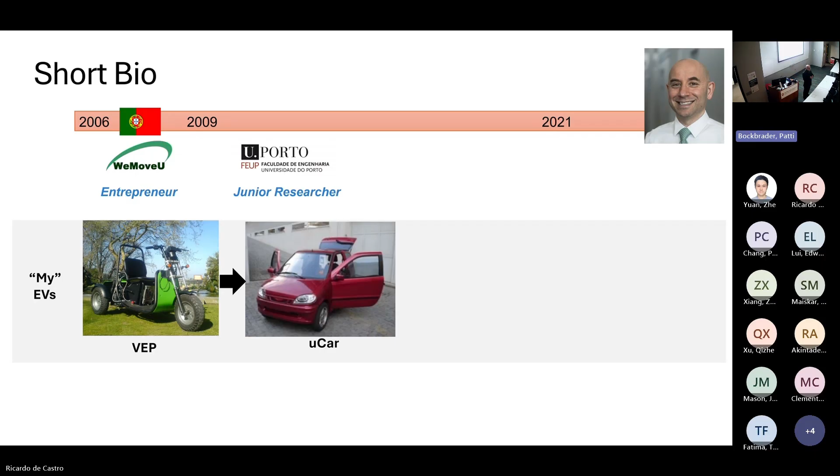So afterwards, I decided to go back to the university to pursue a PhD. There I had the chance to work on my second vehicle, as we call it, a microcar. It was red from the outside, but green from the inside. We were working with batteries, pre-lithium batteries, so the mass was very high. During this time, I was looking into hybridization between high energy batteries and high power supercapacitors.

Afterwards, I went to Germany, and as Marcello said, I worked a few years at the German Aerospace Center, DLR. Their core business is space exploration and satellites, but they also have interest in bringing space technology to Earth applications. I was part of this program for 8 years, and there I had a chance to develop my third electric vehicle, which we call the RoboMobil, the robotic electric vehicle.

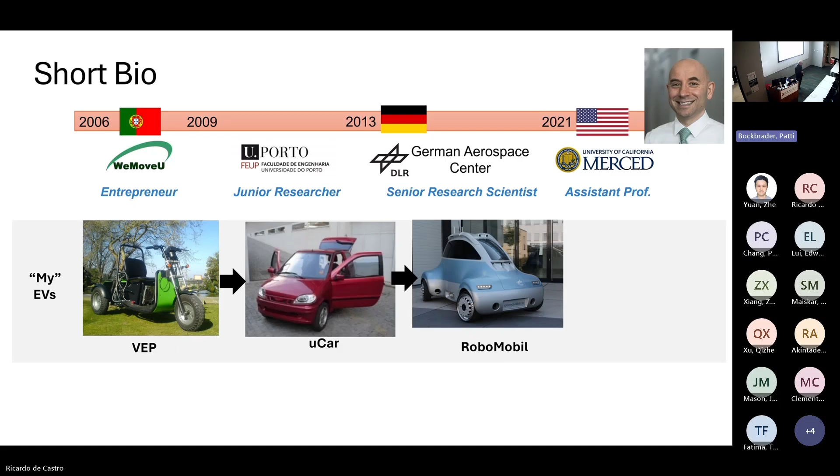Maybe a video to introduce this prototype that we built during my time there.

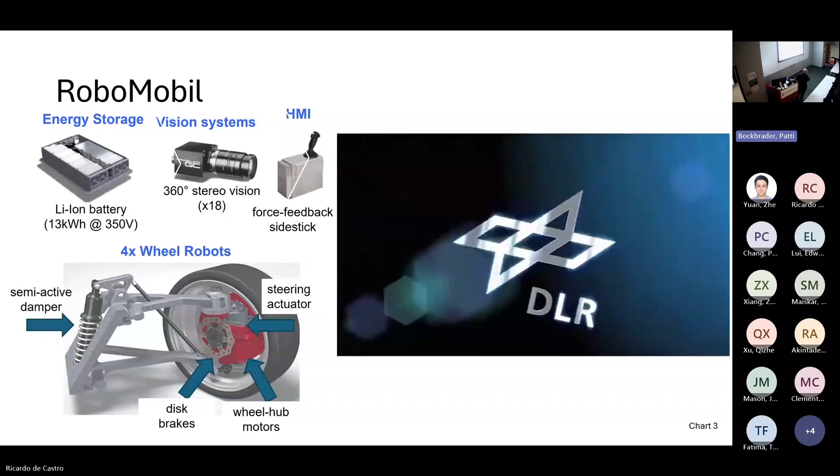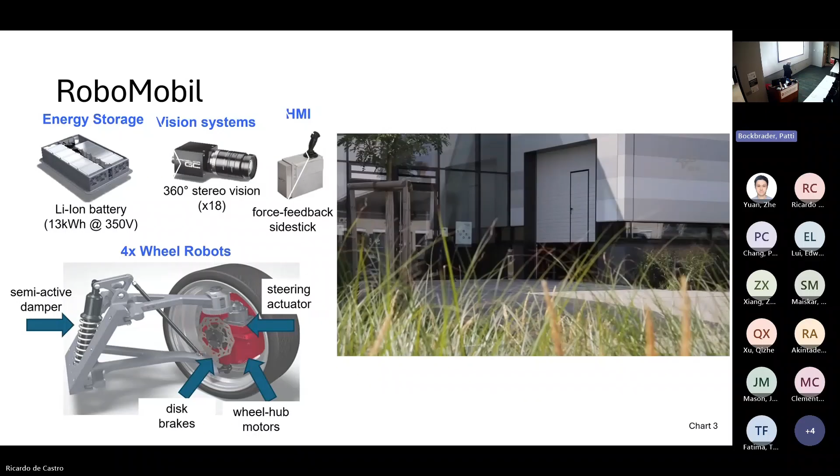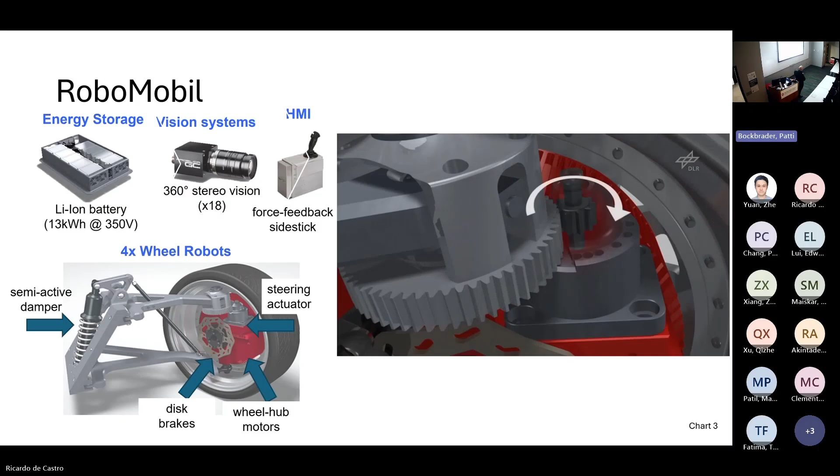So it's electric, has lithium batteries. One unique aspect of this prototype was the propulsion: each wheel had its own hub motor. We also had a steering actuator that allowed the wheels to rotate up to 90 degrees, brake-by-wire actuators, and semi-active dampers. Let's see if I can fast forward. Here you can see the animation of the propulsion. We have four of these actuators in each corner of the car, and we could rotate each wheel 90 degrees, so it was very easy for parallel parking.

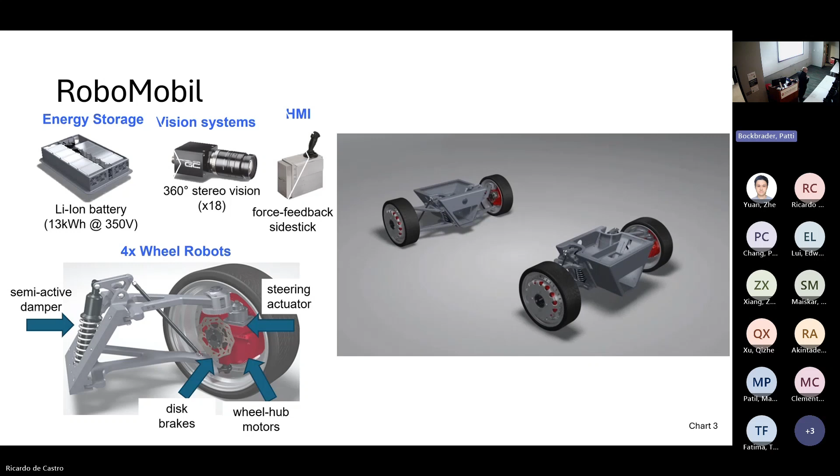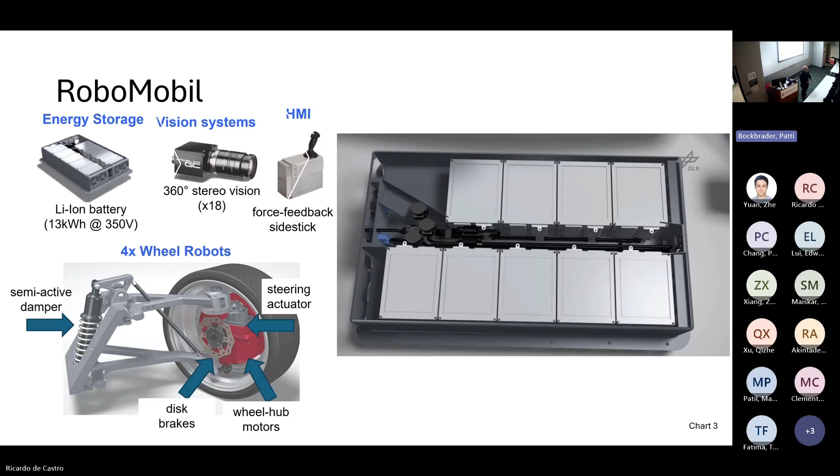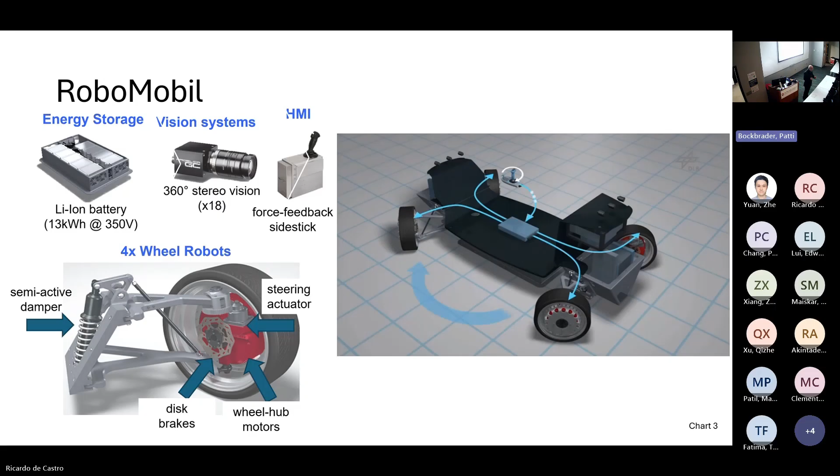Another unique aspect of this prototype was the interaction with the user. There was no steering wheel; we were using a force feedback side stick. So if you're used to playing computer games, it was very easy to use this vehicle. You can see here some of the operating modes of this car—we could rotate sideways, rotate on the spot. The idea of this vehicle was to deploy it in urban environments where space is very tight.

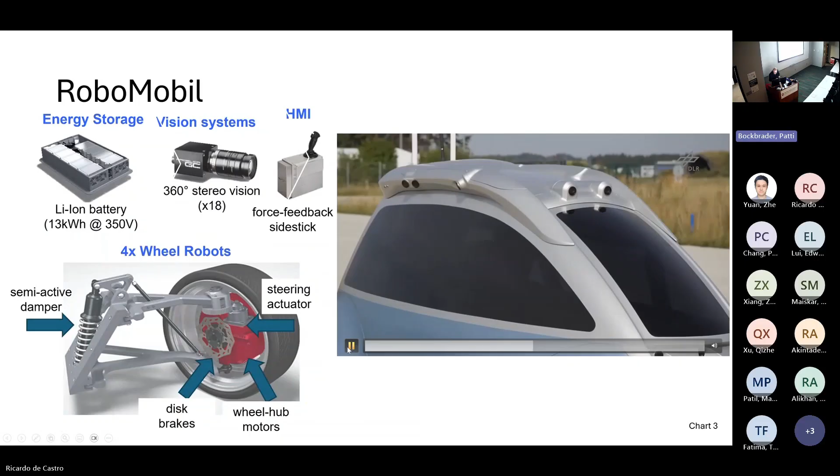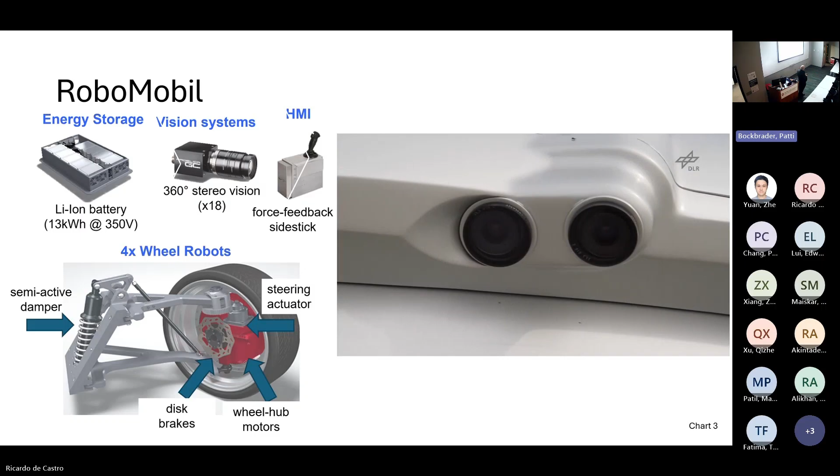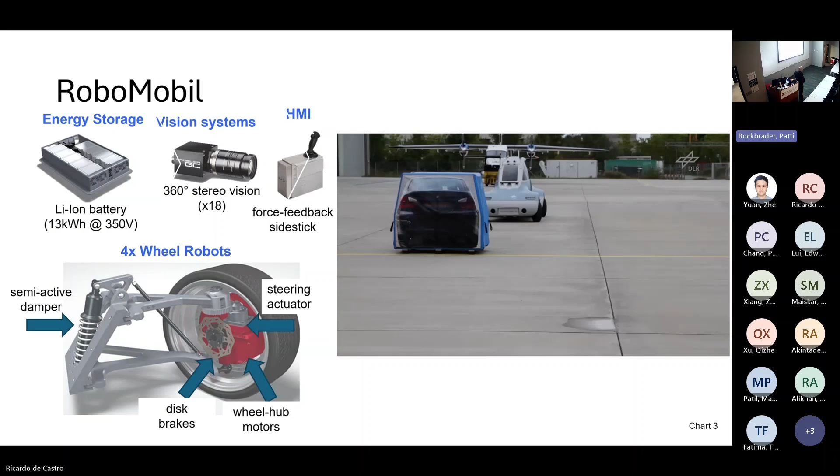In terms of perception, we were using 18 cameras on top of the vehicle. We had different operating modes for the vehicle: manual, semi-autonomous, and autonomous. One of the coolest things you could do was obstacle avoidance, exploiting this for the steering. You can leverage the crab mode to quickly perform avoidance, and the parallel parking was really nice. So if you struggle with parallel parking like me, you can just plug in and do it.

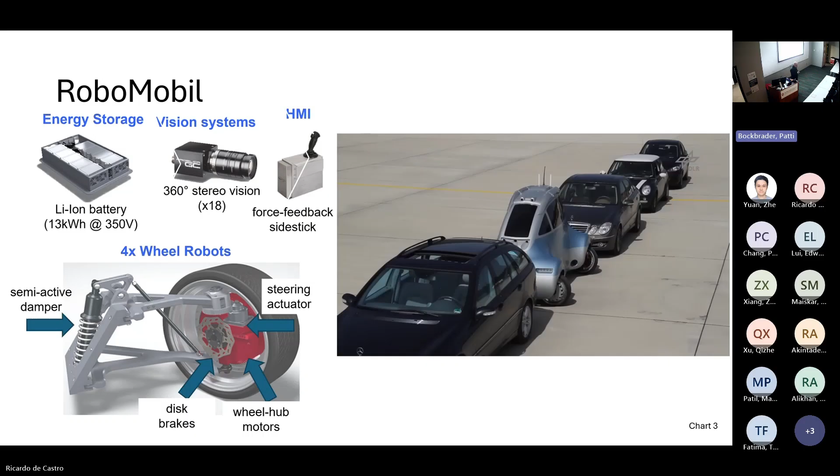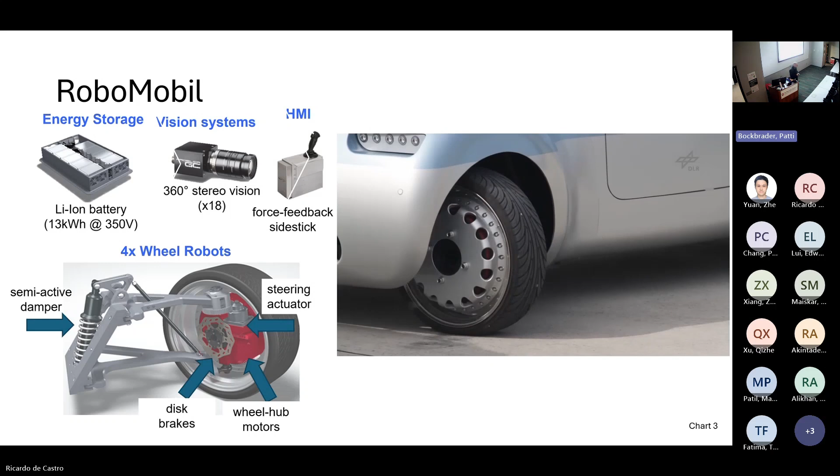So this was my life before coming to America. I was having fun with these prototypes. Then in 2021, I came to California, and I had to restart from scratch—I didn't have access to this kind of infrastructure. So I decided to pivot my career a bit and look more into the transportation aspects.

When I went to California, I realized that the state is at high risk of natural hazards and natural disasters, and one of the highest risks is wildfire. You can see here many areas in the state that have very high risk of wildfire.

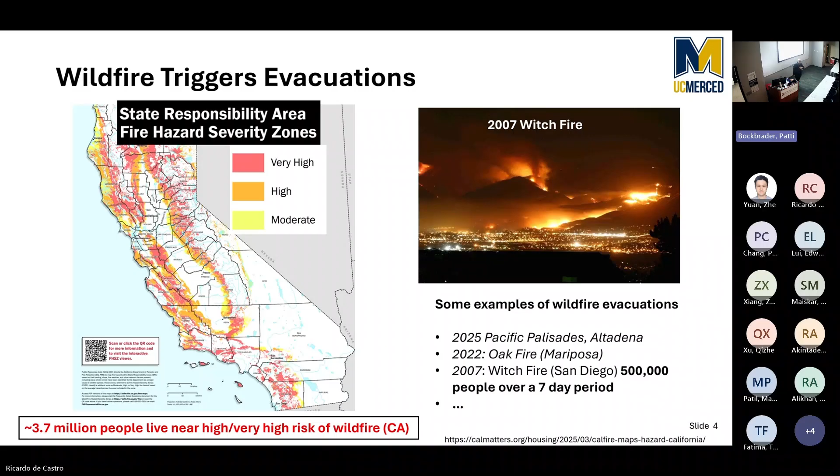Almost 4 million people live in close proximity to this danger. When wildfire occurs, local officials often need to ask people to leave their homes and seek shelter. Probably you heard what happened last year in LA. I live in Merced, close to Mariposa in the Sierra Nevada, and every summer there are evacuations due to wildfires there. The largest evacuation before that happened in 2007 in San Diego, where more than 500,000 people had to leave because of the witch fire.

And it's not just wildfires, there are floods. For instance, there was a big incident before I came to the US, the Oroville Dam, where it failed. They also had to evacuate more than 180,000 people. If you go to Santa Cruz, there are tsunami problems, there's the risk of earthquake. Some of my family lives in Florida, and in the summer, with the thunderstorms, they are always concerned.

So I started to look into these risks and, okay, if we are driving an EV, how can we be prepared to deal with these evacuations? How can we plan for these scenarios?

And if you're looking into EV charging, you also need to consider where the energy comes from for the evacuation. So you look into generation, transmission, which can also be affected by natural hazards. When I started looking into this, I was particularly interested in the EV aspect, understanding if we are ready to deal with these evacuations if everybody is traveling by EV.

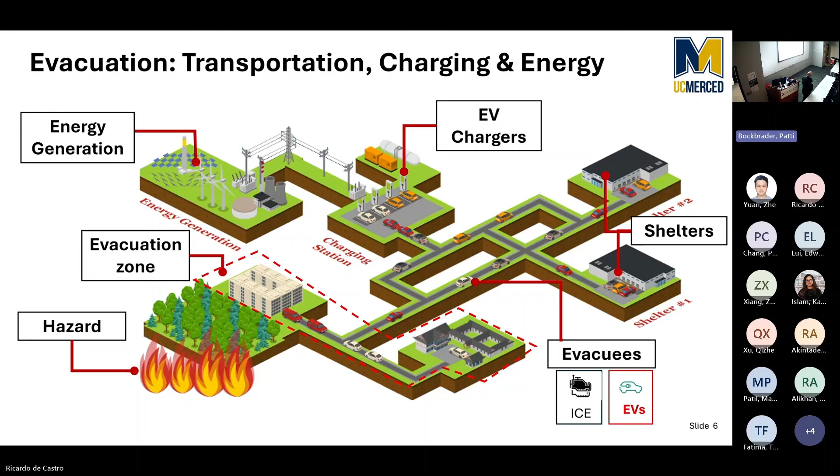Why is that? Well, in California, 39% of the greenhouse gas emissions are generated by transportation. There was a mandate four years ago that sets the goal of selling only EVs by 2035. I don't know if this mandate still holds, but that was the intention of the government. When you talk with the state agencies, they have all these nice projections: right now we are selling 35% of new vehicles with battery, but the goal is to reach 100% in the next 10 years.

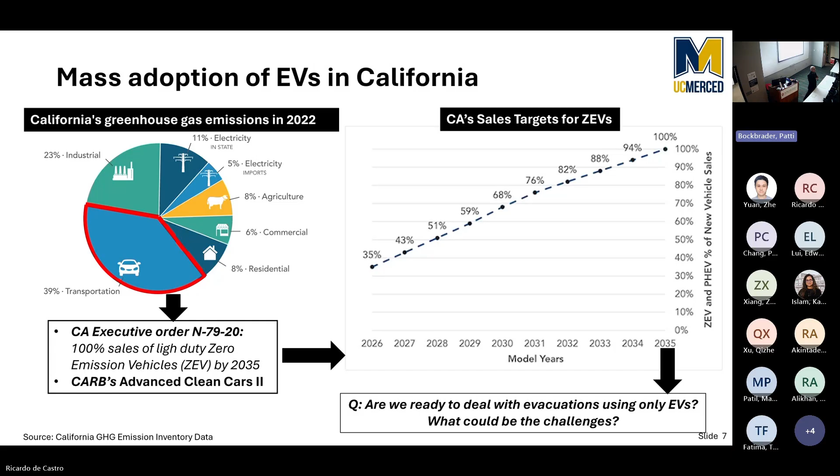So you fast forward 10, 15, 20 years, you have to deal with the evacuation, and the question is, are we ready to deal with this evacuation if everybody drives an EV? So what are the challenges that appear when you're doing an evacuation with EVs?

One challenge is related to charging time. If you only have access to level 1, it might take up to 2 days to charge, which is too slow during an emergency. You can use level 2, you can use DC fast charging, but it's still difficult to compete with gasoline where you can recharge quickly. Because of these long charging times, there are concerns about congestion in charging stations.

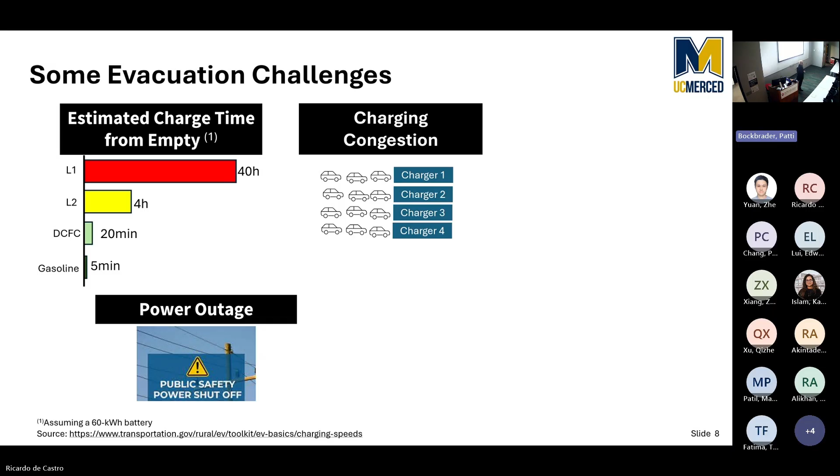There's also concern about power outages. For instance, I live close to the hills, and during summer it's very common for the power utilities to turn off the energy to prevent ignition of fires. So what should you do if you are asked to leave, but you have an EV with no energy in it, nor energy in the grid? You're in trouble. There's also traffic congestion that affects any kind of vehicle that you use.

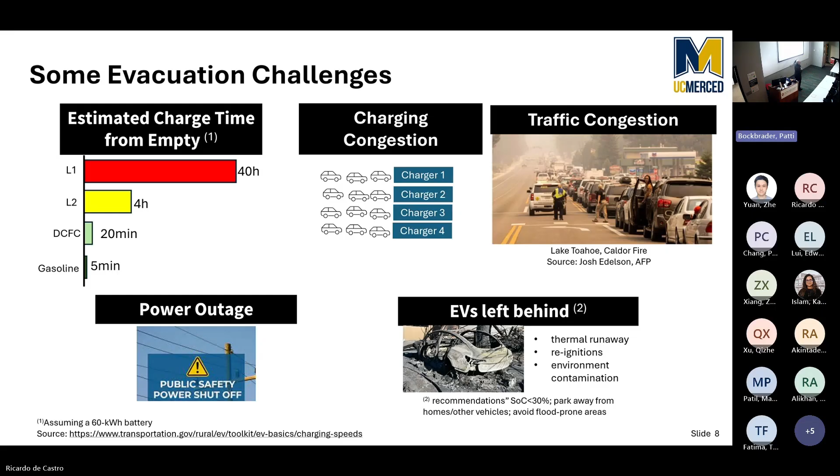Last year, the fires in LA also raised awareness for the risk of EVs that are left behind. If these EVs have batteries that catch fire, those fires are more intense. They also release chemical contaminations that are much more difficult for the cleanup of the fire. So we also need to think about the best practices to deal with these EVs.

With this background, I'd like to tell you more about three topics of my research. One is related to the routing of traffic during emergency cases, taking into account charging constraints of EVs, and also looking into leveraging mobile charging units that can support the fixed charging infrastructure if it's affected. So where should we deploy charging units?

In the second part of the talk, I'd like to show you some control algorithms we've been developing to reduce charging time for battery EVs, which is important not only during day-to-day operation but also during emergencies. Finally, if time allows, I'd like to touch on recent work deploying mobile robots to prevent wildfires—or rather, to prevent the need for evacuation. That's the third topic.

Let's look into the planning setup. I assume there is a given area at risk of natural hazard, with an evacuation zone, and I collect requests from people who want to leave: when do they start, where do they want to go, and what is their initial driving range available? We collect all these evacuation requests, and our goal is to recommend a route so people can reach the shelter as fast as possible while taking into account energy constraints.

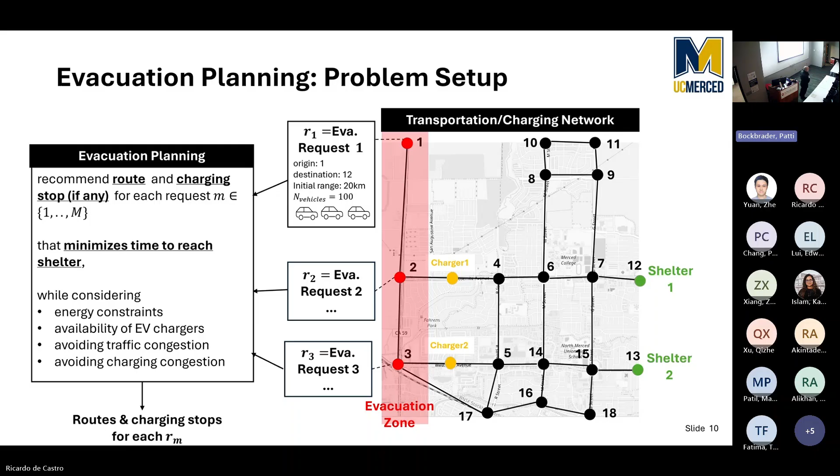Typically, this problem belongs to transportation engineering. As I mentioned, I'm an electrical engineer, so how do I start looking into this? I realized that in the last 20 years, I've been routing electrons in circuits. In transportation, what you move is vehicles; in circuits, what you move is charge. When charge is moving, you have current. On the transportation side, when you're moving cars, you have flow.

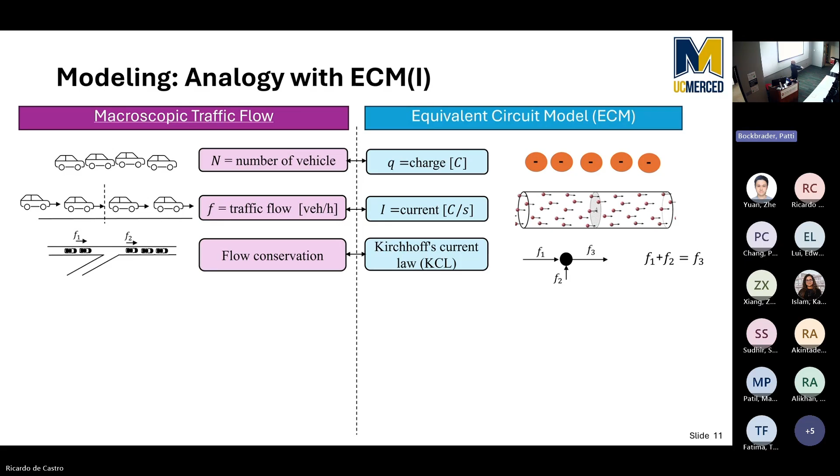Also, if you talk with transportation engineers, they tell you about flow conservation—if you have multiple lanes joining, the summation of flow must be conserved. In electrical engineering, we call this Kirchhoff's current law.

When you look into the fundamental relationships connecting the concentration of vehicles in a given road link and travel time, you see many similarities with macroscopic electrical relationships. Flow plays the role of current, resistance plays the role of travel time, and voltage plays the role of vehicle concentration. At the end of the day, you can implement this using nonlinear resistors.

Often you don't want to spend too much time traveling in a road link, so you want to limit the concentration of vehicles—or in the electrical analog, limit voltages and currents to prevent failure. That's how I understood this problem with my electrical engineering background.

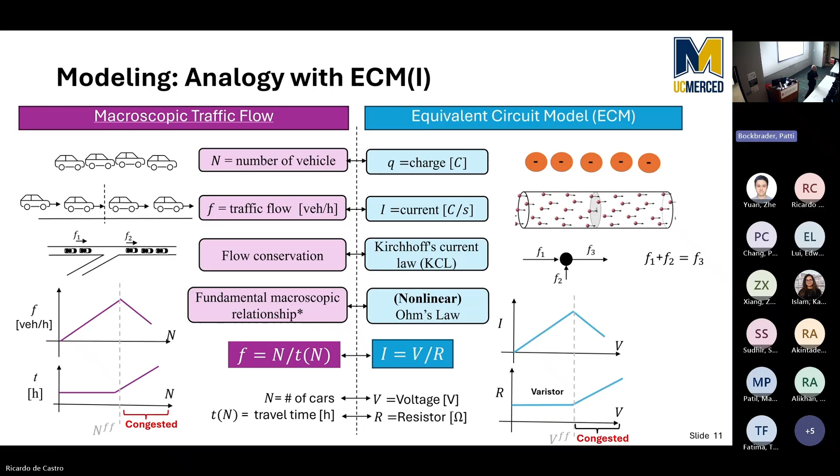Let's move on with the setup. We have transportation nodes that become electrical nodes. To model the time lost traveling from one node to another, I add resistors to each link or branch. I also add switches to these links because I'm interested in routing traffic, or routing current, so the switches let me decide where current or flow goes.

I may need to stop for recharging, so how do I model the stoppage time I lose? I add another resistance, and a special single-pole, double-throw switch that indicates if I stop to charge or bypass. Then I also need to include a few current sources.

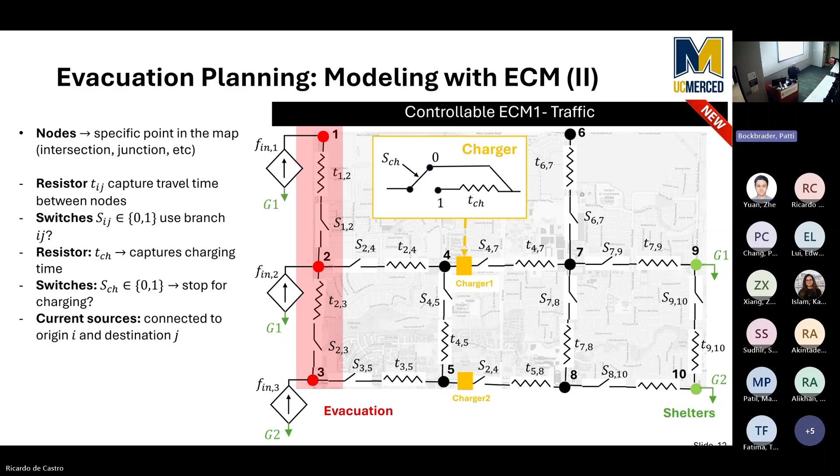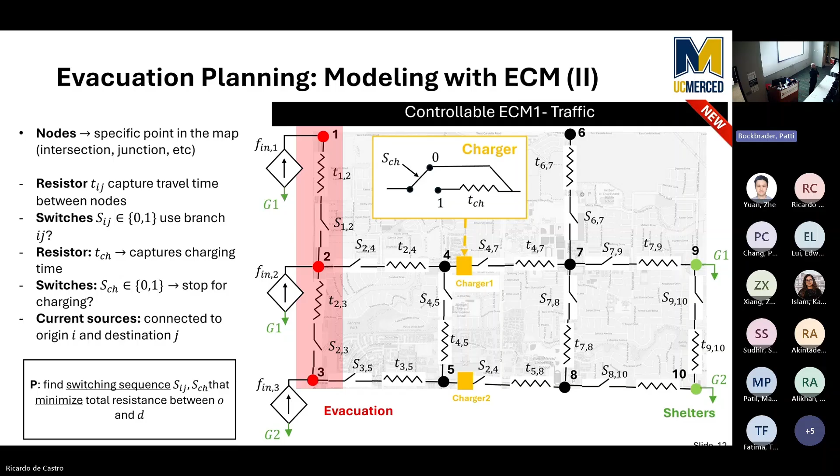One terminal of the current source indicates the origin of the traffic, and the other terminal indicates where the traffic goes. Through this analogy, the end goal is to find the sequence of switches that minimizes the total resistance between origin and destination—in other words, find the path of least resistance, which electrical engineers have been doing for a long time.

But that's not all. With an electric vehicle, you have constraints in terms of driving range. To capture that constraint, we created a second, dual circuit. In this second circuit, we use voltage as a proxy for state of charge, or driving range. We have the same structure, same nodes, same branches, but now between two nodes I connect a voltage source that mimics the loss of range experienced when going from one node to the other.

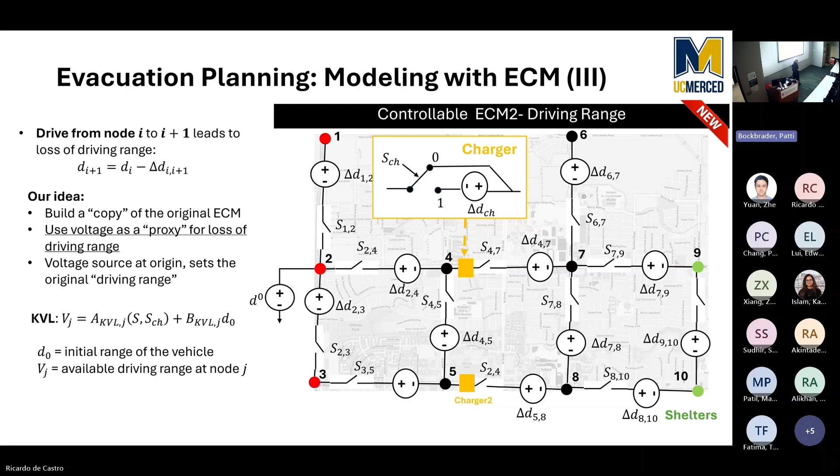There is a voltage drop representing a loss of driving range. If you stop to recharge, there's an increase in potential, so you gain energy during that moment. At the end of the day, what you want to do is guarantee that the voltage at all these nodes stays positive, so you have enough energy to reach your destination.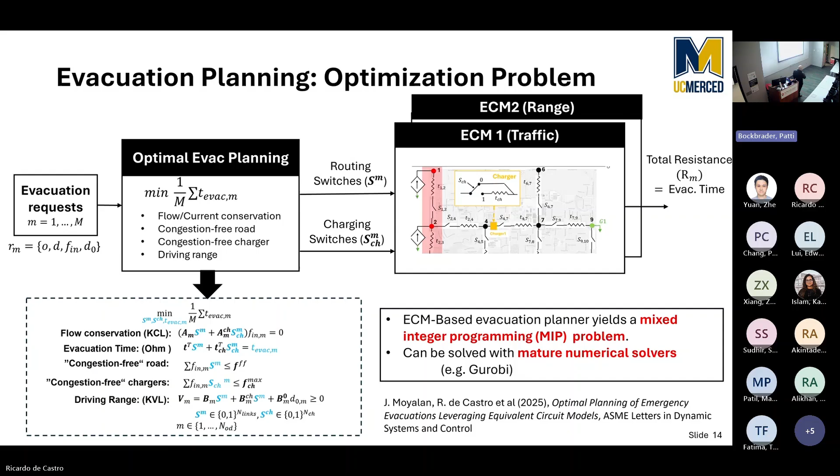So let's see how this works in practice. I created a use case for Mariposa. Mariposa is very close to Yosemite National Park, so there's lots of forest around the county. And together with the local officials, we came up with this use case where we assume that there is a wildfire affecting downtown, and we selected a couple of shelters where people can go.

So in our framework, what we do after defining this use case is to build this equivalent circuit. You can see here the current sources that are injecting current in downtown, emulating the traffic that appears during this scenario. And then you have the grounds that are connected to the destinations. Then you have all the resistors and switches that capture the travel time. We then figure out the switching sequence using an optimizer, and then we assess the performance of this evacuation strategy using a traffic simulator.

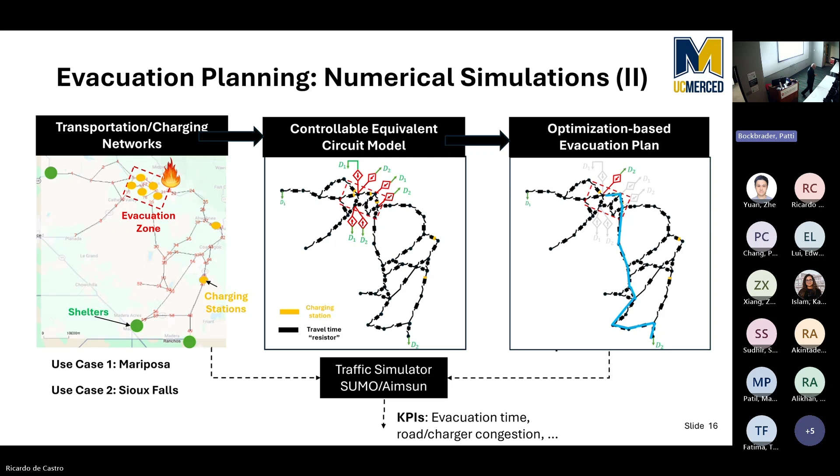We did some comparisons between different evacuation strategies. One strategy is nobody cooperates, everybody tries to follow the shortest path to get to the shelter. Then we have another approach, I would call it joint evacuation, where everybody cooperates and everybody follows the optimal path, so it's the best for everybody. And then we also looked into an iterative evacuation scheme where we rank all these evacuees based on proximity to danger. So the folks that are closer to hazard, they have priority in accessing the transportation network and also priority in accessing the charging network. And that's the last one.

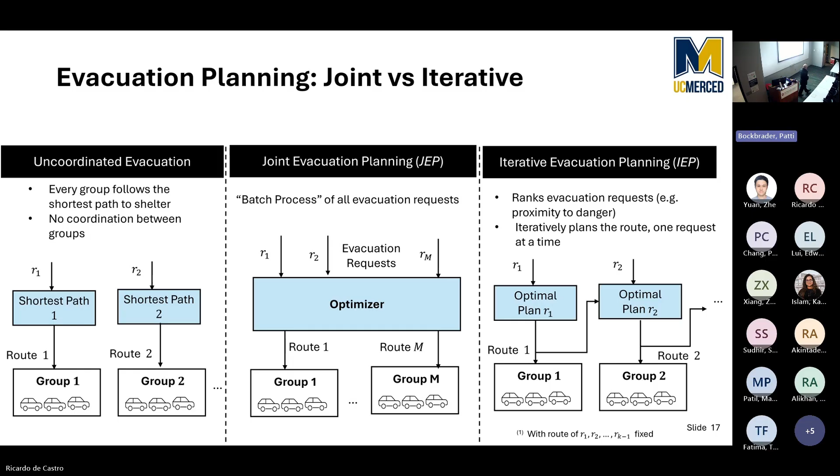So here's some results that we got from Mariposa, and we evaluated this in Sumo, which is a traffic simulator. So you can see here the average travel time. In the horizontal axis, we have three of the evacuation groups.

So the group here on the left is called the danger group. In blue, you have the time when people do not cooperate. And then in orange, you have the joint evacuation planning that provides the best time for the average of all the groups. And then you also have, in green, the iterative evacuation planning, which is very good for the folks that are close to danger. But then as we move away, you need a bit longer evacuation time.

Also, if you look into the routes, with the uncoordinated approach, everybody follows the same path, so there's congestion on the road. And then with these optimization-based schemes, you get more diversity of paths, so you're smarter about how you route traffic, and that can make a difference if you need to evacuate quickly.

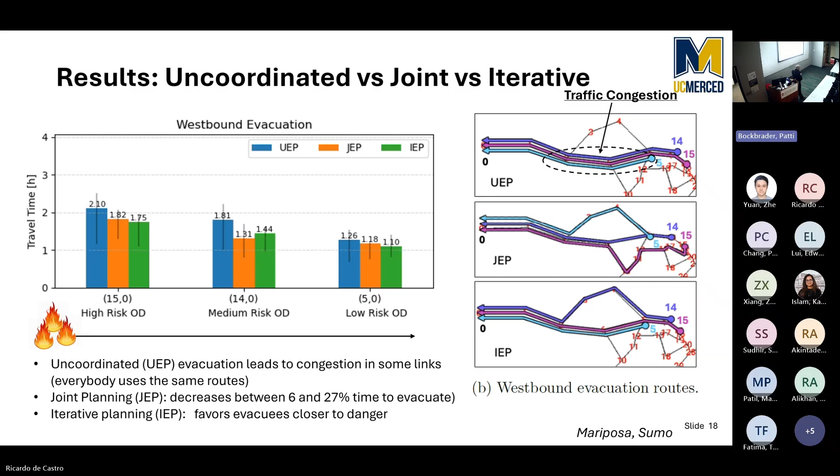Then we also did some sensitivity analysis, and for instance, looked into what happens if you change the initial state of charge. So you have here the average evacuation time as a function of the initial SOC, and the trend that you see is that you need less time if you have a higher state of charge. That means you don't need to stop for recharging.

And when I shared this with the local officials, they liked this very much because for them, they can come up with a communication campaign to tell people, hey, if evacuation is likely, make sure your state of charge is high during this period. So it's a very effective strategy to prepare people for this.

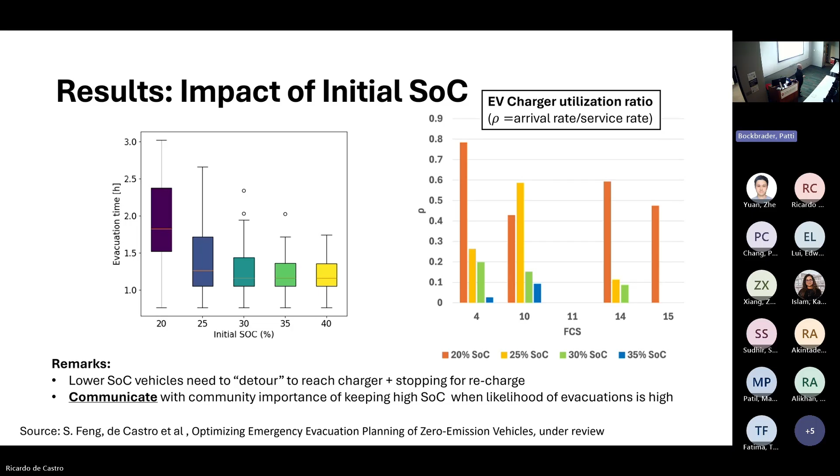Then another analysis that we did was to investigate what happens if you change the charging rate and travel speed that you have in the network, and what is the impact on the overall clearance time, the time you need to evacuate everyone. And the trend that you see, I think, also makes sense: if you can drive faster and charge at higher rates, you need less time.

But more interestingly for us is to look into these level curves. So imagine that you are a local planner and you have a certain goal, like I want to evacuate this community in 15 hours, for instance. So if the travel speed in your community is low, then it might pay off for you to install fast, very fast chargers.

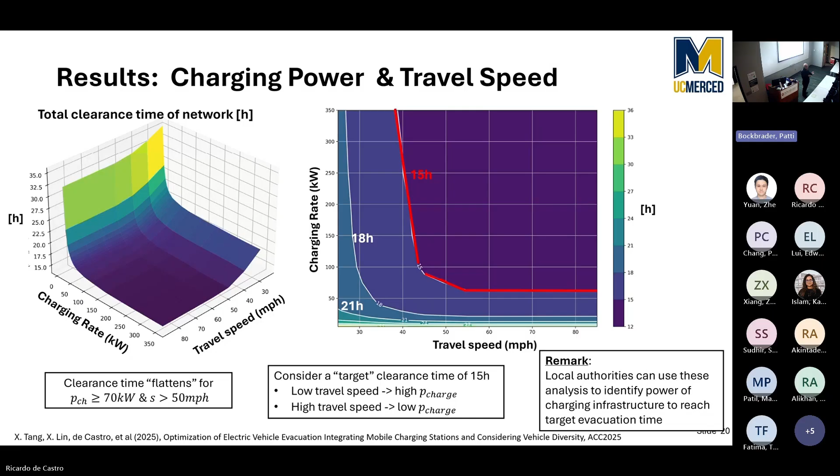On the other hand, if you're in a community where the travel speed is higher, like in a rural environment, then you don't need such high charging powers. So this provides a trade-off for the city planners to understand where they can put the effort and the resources.

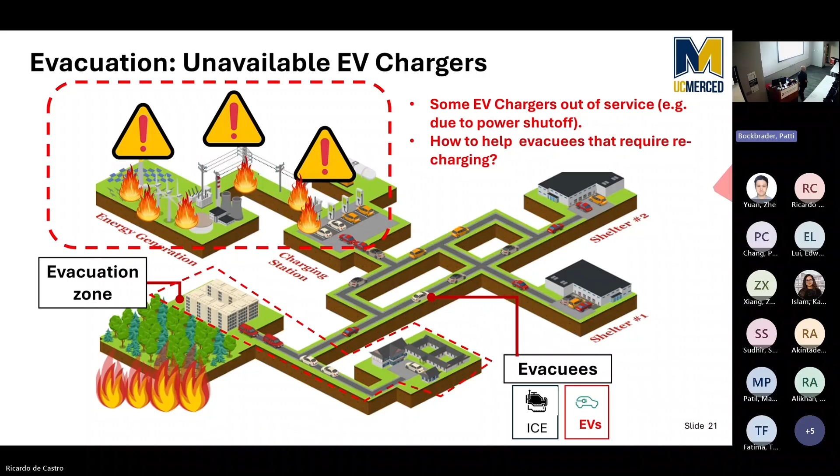Now let's look into another dimension related to the loss of power in the charging, fixed charging infrastructure. So if you are evacuating and you go to a fixed charging station and this station is not available, what should we do? We've been looking into deployment of mobile chargers.

These are chargers that have energy storage. They have wheels, so you can very quickly and easily redeploy them in the area. They can provide level 2 or DC fast charging. In terms of storage, there are batteries, hydrogen, propane. There are dozens and dozens of companies out there building these chargers.

When we started talking with our local partner, they asked us, okay, great idea, but how many of these mobile chargers should we deploy? And where should we deploy them during these emergencies?

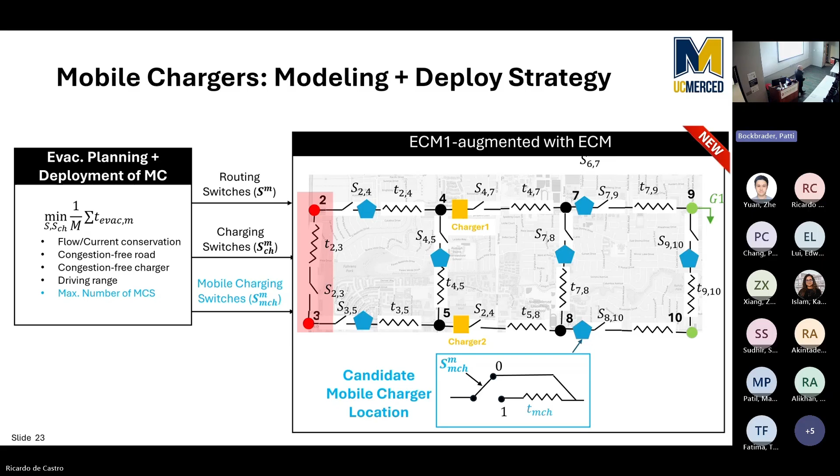So we went back to our electrical analogy, and we had to extend our model with these mobile chargers. What we did was look into candidate locations for the deployment of the chargers. We added a resistance and another switch to indicate if we use this mobile charger, and then we also extended our optimization framework in order to manipulate this additional degree of freedom.

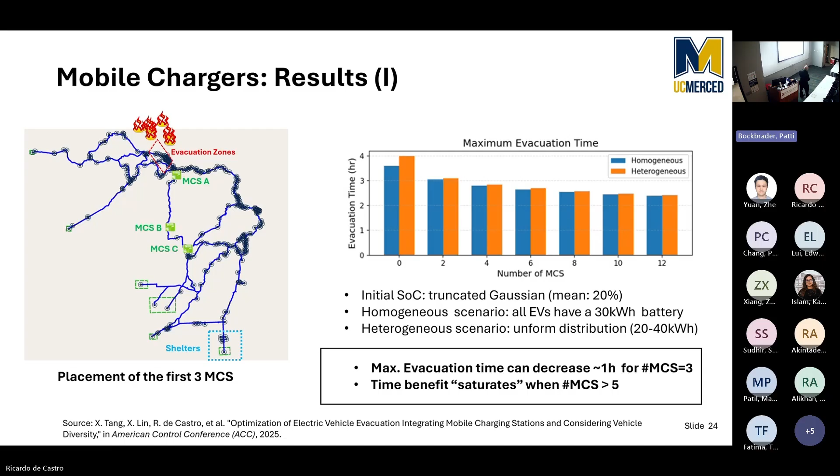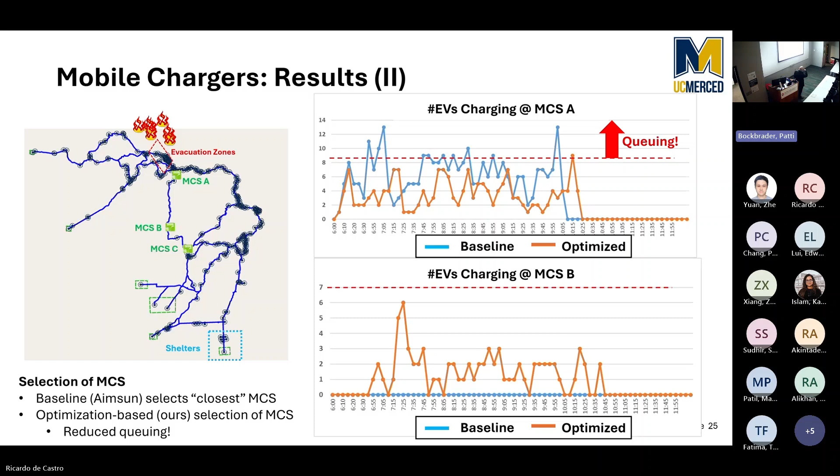This information is useful for the community to understand how many of these units they should buy and also where to deploy them. We also did a comparison between this optimization-based placement and routing versus a baseline provided by Aimsun, a traffic simulator. Essentially, with this optimization scheme, you're able to redistribute people among different chargers, so you avoid queuing and wasting time during the evacuation.

I'm going to conclude the first part of my presentation. In summary, we have been exploiting these controllable equivalent circuit models for transportation purposes. They are able to capture travel time, charging time, and also guide the placement of mobile chargers. We've also been looking into optimization-based schemes for the routing, and iterative schemes for planning the evacuation. We deploy these tools in the real world, in this case in Mariposa, which allows us to get insights into electric transportation during these scenarios.

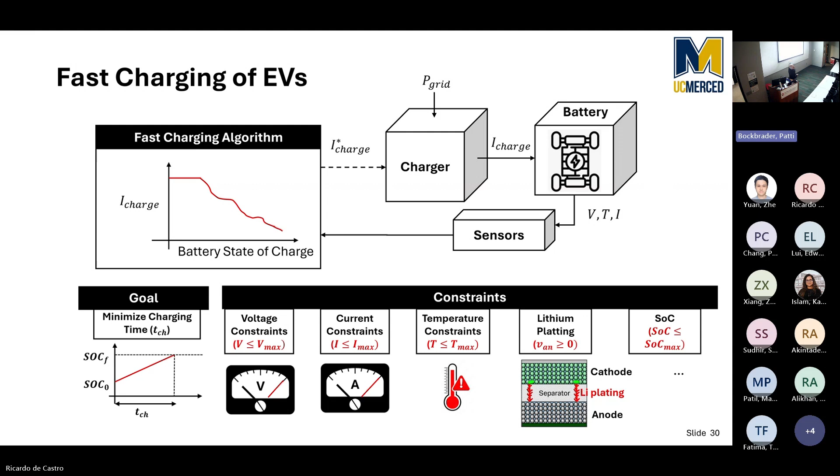So you have electrical constraints, voltage, current. You also have temperature constraints. There are elements inside the battery that are very thermal sensitive, and you don't want very high temperature. There's also lithium plating, which is lithium deposited on one of the electrodes that can grow, pierce the separator, and create short circuits. So we want to come up with a charging protocol using controls that deal with all these requirements.

If you look into the literature, there are at least three main branches to solve this problem. One branch is more like heuristics, where people use constant current, constant voltage. There's also pulse charging that is gaining popularity in recent years. There's also reinforcement learning using data-driven approaches. And then you have model-based methods. The holy grail has been MPC control.

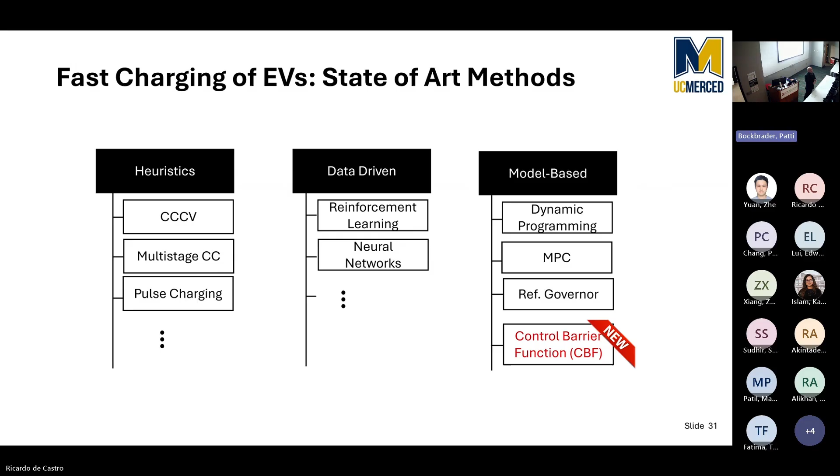We also have other approaches. In my group, we've been investigating for the last three years a methodology using control barrier functions, which are very popular these days in the literature, and trying to apply these CBFs to the fast charging problem. Why CBFs? They are able to enforce the constraints while having less computational effort versus something like MPC.

These are model-based, so we need a model. Guess what? Here I'm going to use circuits to model the battery. One technicality here is that we are using an electric circuit composed of two circuits: one circuit for the anode, another circuit for the cathode. This allows us to predict what is the voltage of the anode.

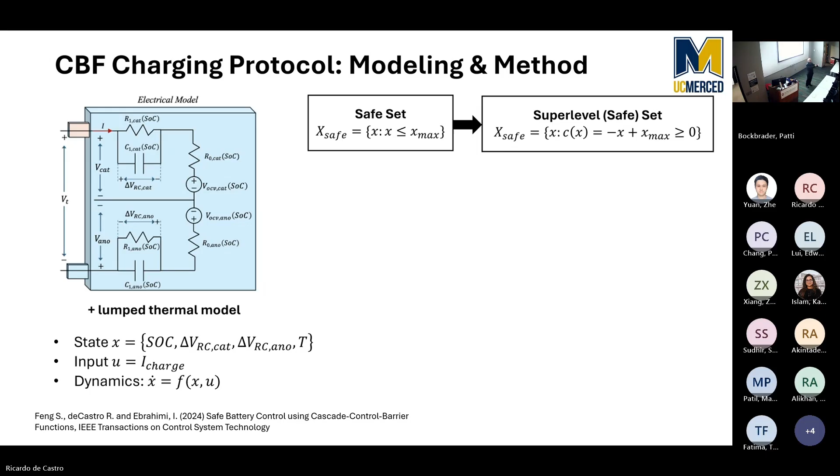We need to specify a bunch of upper limits that we don't want to exceed: temperature, voltage, you name it. So in the control barrier function approach, what we normally do is map each one of these inequalities into a super level set. Essentially, we build a function here in this slide called C that measures the distance to the boundary of your safe set. So if you're at the boundary, this C is 0. And if you are violating the boundary, C is negative.

So when you are building these CBFs, what you want to do is limit the speed at which you are approaching the boundary. And if you violate the boundary, then you want to have higher speed to bring the state back. So in this CBF approach, essentially what you are doing is introducing a bound on how fast you are pushing the boundary, and then you can map these bounds into a set of control actions that enforce the constraints.

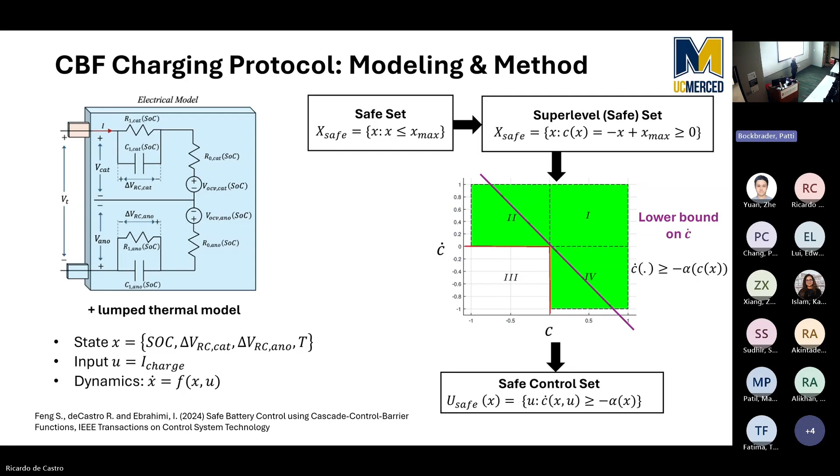So we apply this to the battery, and what we are doing here is we have a bunch of constraints, and we are monitoring at each time instant what is the maximum current I can apply such that I don't violate any of these constraints.

So when you look into the animation, we have all these possible safe currents that I can apply, and then at the end of the day, I just apply the minimum of all these safe currents, which is going to fulfill all the safety constraints.

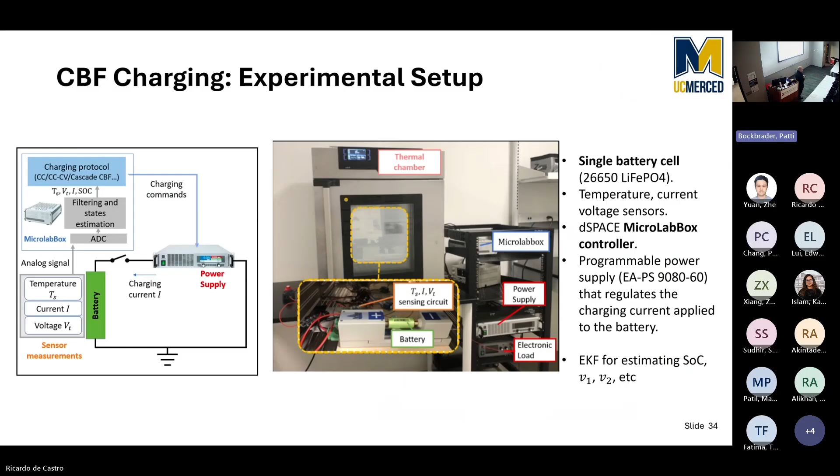So then we hit the maximum voltage limit. It can be the terminal or the lithium plating constraint. And then for most of the charging, we are going to operate at the maximum possible temperature that the battery allows until we reach the end of the charge.

We also did a comparison between these control barrier functions versus the CCCV. We were able to decrease the charging time by up to 24%.

We also did some comparisons between the control barrier function and MPC. What we observed is that the CBF is able to provide very similar levels of performance and constraint satisfaction as the MPC, but the main difference is the computational effort that you need.

We're able to decrease the execution time by more than 7 times, which is particularly attractive for the automotive industry, where they want to implement these algorithms on board microprocessors with limited resources.

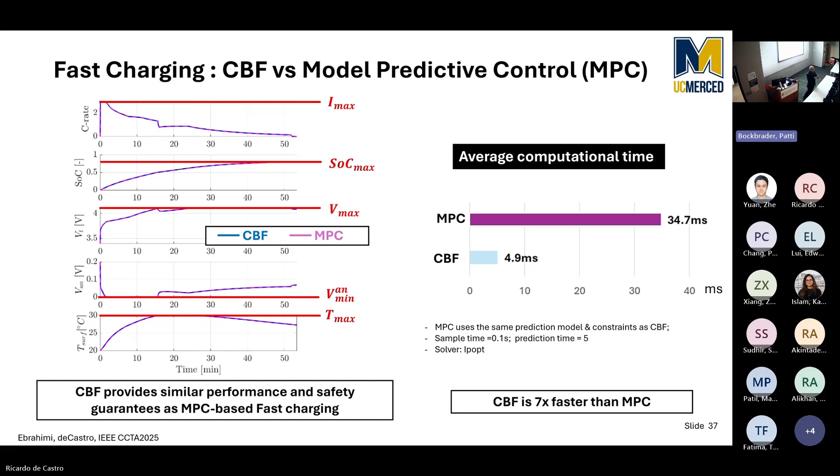And what is the next step? UC Merced is part of the BWC competition, and so we are planning to bring some of these algorithms to the battery. I don't know if we're going to make it, but we're making an effort to test it at the pack level.

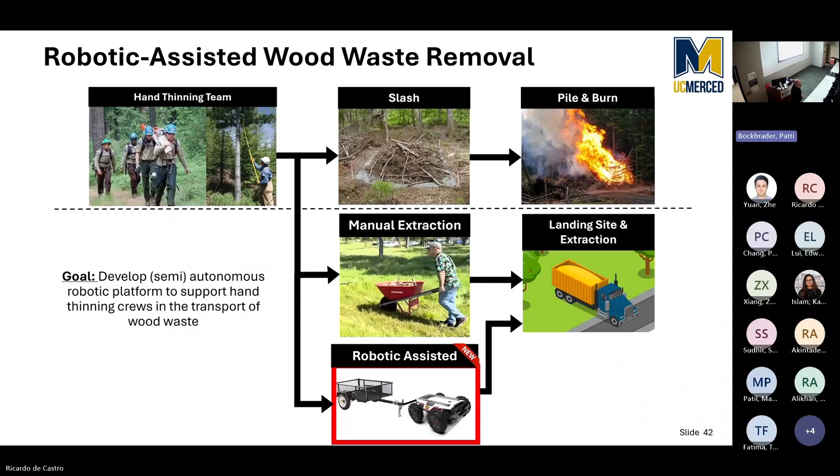So we've been developing robotic approaches to automate the transport of this slash inside the forest. We've been building a platform with four motors, cameras, lidars, and actual trailers that can support the crew in the forest—they can dump the slash here and use this platform to accelerate the extraction of waste.

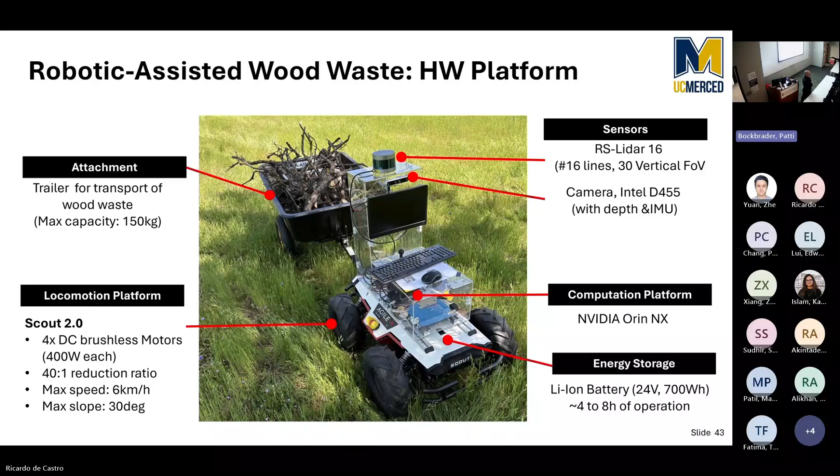Interestingly, developing a controller for this platform is not that different from developing a controller for a car. The first controller we developed was to follow the person in front of the robot—a controller that monitors the distance between the lead person and the robot, kind of like a cruise control for this problem. We also have a lateral controller to track the lateral motion of the person, and we are using control barrier functions for obstacle avoidance.

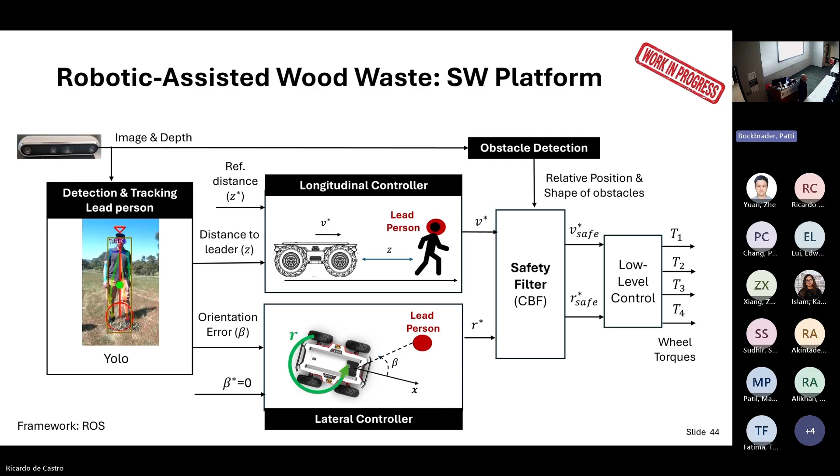These are some of the first tests we did last summer—a comparison between the robot-assisted approach, where the robot follows the person carrying the slash, versus the human approach, where you have to carry the wood waste yourself until you reach the landing site. If you have to do this for 4, 5, 6 hours in a day, you're going to be wasted very quickly.

So I believe that automating these tasks will play a big role in the future for us to get rid of this fuel. I'm still trying to understand if there will be economics for this wood waste that we are shipping to the landing site.

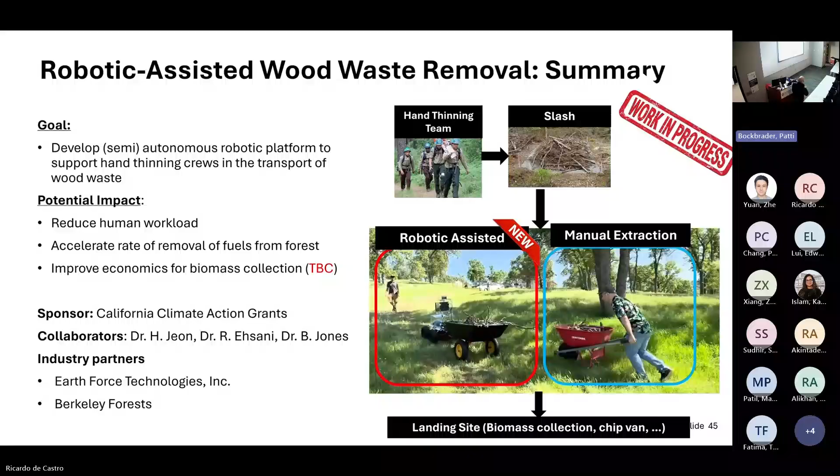I have to make immediately a comment for business opportunities that work here in Ohio. Robotic assisted snow blowers. I can see people would pay for this immediately, okay?

Thank you so much, very nice and very representative. Any questions from the audience?

Yes, that's a very good question. Right now, testing the results, I'm assuming that people are compliant and that they follow the best instructions that we can give them. In practice, will they follow this or not? That's a big question. If you want to model that, we can inject some level of uncertainty into the simulations and introduce some level of panic. We're kind of doing that. I didn't show the results yet, but we're looking into that as well.

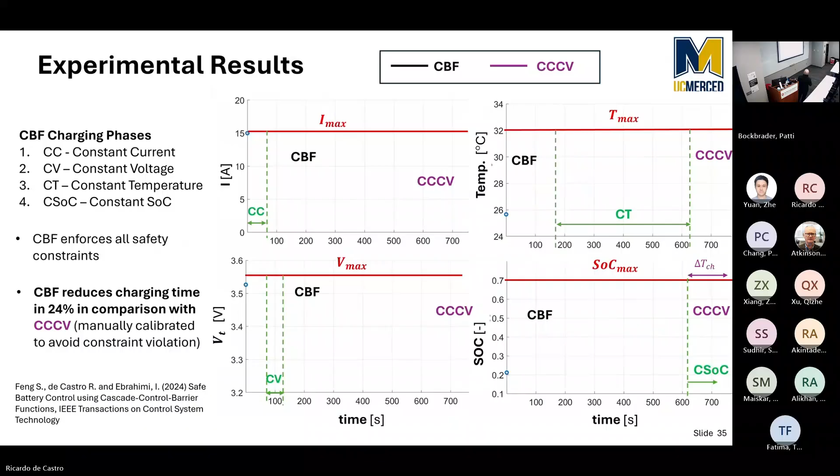So you can try to build a CBF that handles all the constraints simultaneously. Another approach we've been exploring is to decompose these constraints and look at one at a time. So imagine you just want to enforce maximum temperature - you build a CBF that focuses on this particular problem, trying to find the maximum current you can apply to the battery without violating the temperature limit. Then you do the same for lithium plating, for voltage. You're doing one at a time.

And then how do you bring them together? What is the safest current? The minimum, right? That was the trick. It's pretty, in fact I have to say, even the computational times I show are misleading because I can implement these analytically, so the computational time benefits might be... These are four running in parallel, right? Yes, four CBFs running. Yes.

And then if the customer comes back and says, oh, I want to implement this additional feature, you can add another one - so it's very modular. We have a patent pending on this. We're trying to commercialize, and we know some customers happy to chat.

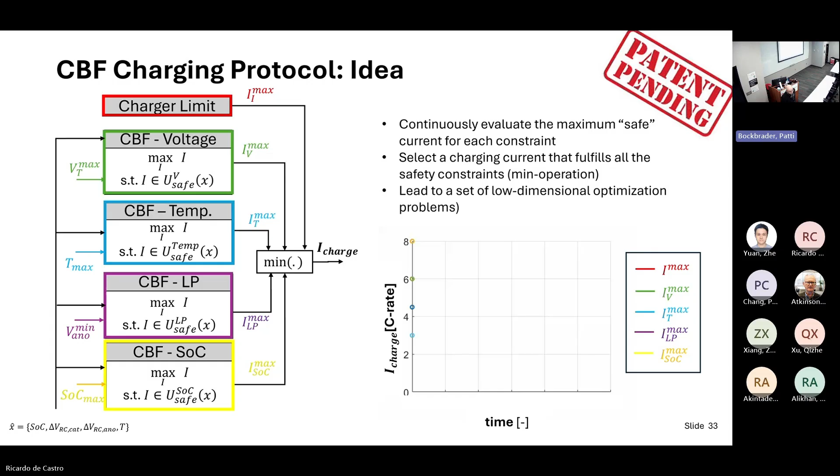Maybe I missed it, but can you tell a little more about these mobile charging stations? Are those common products? Do they use a diesel engine? How does all that stuff work?

When I started the project, I had no idea—I thought there were only 1 or 2 manufacturers. But then when you go to a trade show, like Advanced Clean Transportation, half the show is just dozens and dozens of them. They come in different shapes and sizes. This one is a bit smaller, it has about 20 kW power, it's battery-based, and can provide up to 5 DC charging ports. But it can scale all the way up to truck level, and if you add hydrogen or propane, you get megawatt-level power.

In fact, some of the companies I spoke with are planning to deploy these not for evacuations, but for the Olympic Games in LA—I think it's 2028. They're also planning electrical eVTOL operations during that time, and you have to ask, how are you going to charge those eVTOLs? You don't have the infrastructure, so they're planning to deploy this kind of mobile charger for that use case.

But then I see, probably I can also sell these to local authorities that might need to deploy this in case of an emergency.

Yeah, I was speaking of that—I was actually intrigued by the economics of it because I don't imagine them as being cheap. Yeah, exactly, that's the same feedback I hear. So who's going to pay for this?